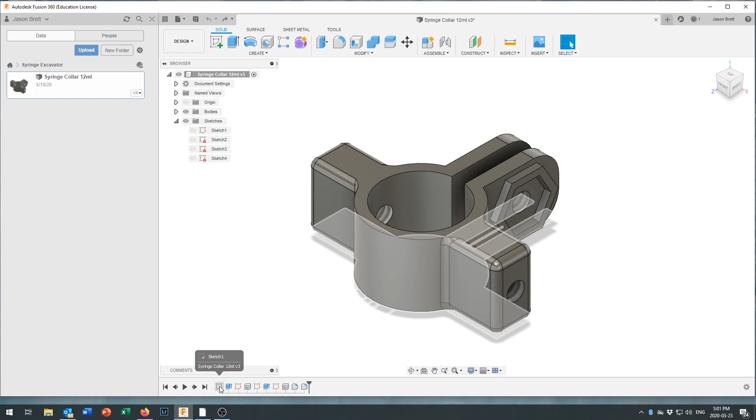Now, thankfully, when we designed the syringe clamp in the previous tutorial, we designed it parametrically, so we can come down here and go back to sketch 1 in our design. I came along the timeline at the bottom right here—these are all the different steps that I did while creating it. I went back to my very first step where I defined the critical diameters.

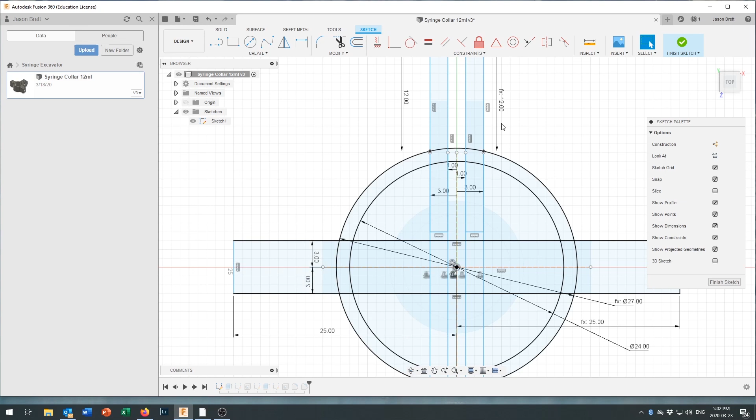And if I take that up to 24 millimeters, that makes that quite large. Since that's up to 24 millimeters in diameter right now, we probably also want to extend the mounting points out to, let's take it out to at least 25 on each side. That'll give us a 50 millimeter wide bracket. And we can finish that sketch right there. And there we are with our new dimensions all put together and ready to go.

So this will actually fit really nicely onto a 30 milliliter syringe. And we've got a few other sizes that I'll share with you in the comments or in the details section.

But now what we want to do is we want to 3D print that. And in order to 3D print it, we need to get an STL file. So what we're going to do is we're going to come over here and under Tools. Click on your Tools, and under Tools, you want to click on Make, and then it asks you for the selection. You want to make this part.

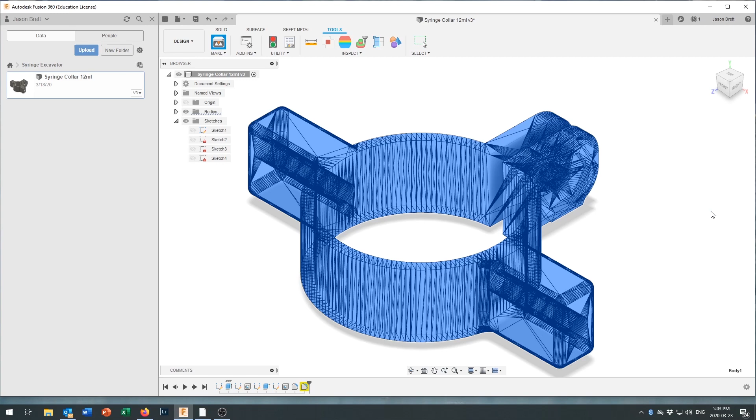It goes through, it meshes that part for you. You can leave it at a high resolution, and we're just going to click on OK. And it will ask you, where do you want to put that model? I'll put it in my 3D printed models folder, and I'll give it a unique name, JB Syringe Clamp 30 milliliters.

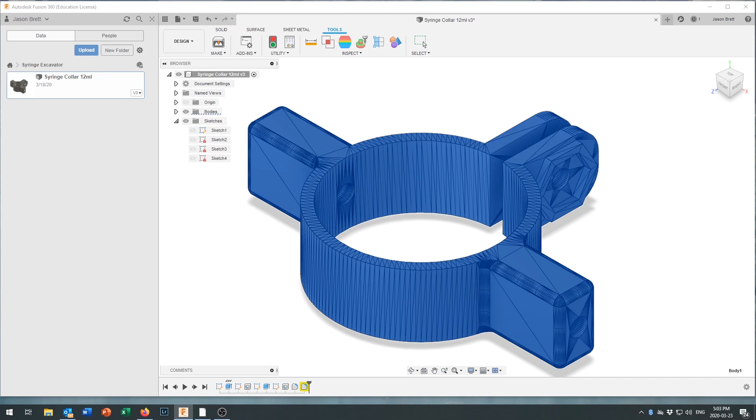Okay, so now I've exported this file as an STL file, and I can use a slicer program like Cura to slice it and get it ready for printing on a 3D printer.

So now that you've got your STL downloaded, it's time to switch to your slicing software. The slicing software I'm going to demonstrate is Cura. Cura is developed by Ultimaker for use with their Ultimaker machines, but it's also available to create G-code, sliced code for creating files on just about any machine.

There's many other slicers out there, and arguing which slicer is the best is kind of like arguing whether Windows or Macintosh is best. There's obviously one right answer, but people don't like you to tell them. What? Edit, we should edit that.

Anyway, in the software, come to software, and what you want to do is you just want to go ahead and download version 4.5 or whatever the latest version is, and it should be available for Mac or PC, and you should be able to go ahead and download that for free. It's even available for Linux.

So while that file is downloading, just hang on here a second. There's their thank you file, and you can just run it from the download folder.

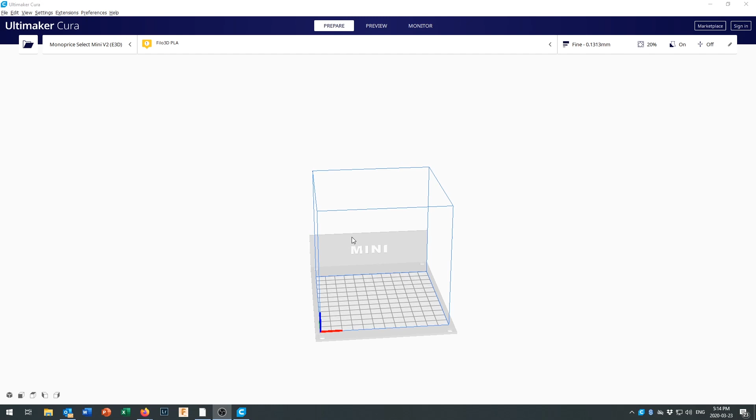Now yours probably comes up showing a picture of an Ultimaker. That's because I've had this set up before, and I've already got it configured for the Monoprice Minis that we'll be using. So you need to come into Settings, and under Printer, set your files up from Monoprice Select Mini V2, which is what we're going to be using at BCIT.

Yes, we have the Ultimaker 3. Yes, we have the Ultimaker S5. But for this part, we can make it on the Mini.

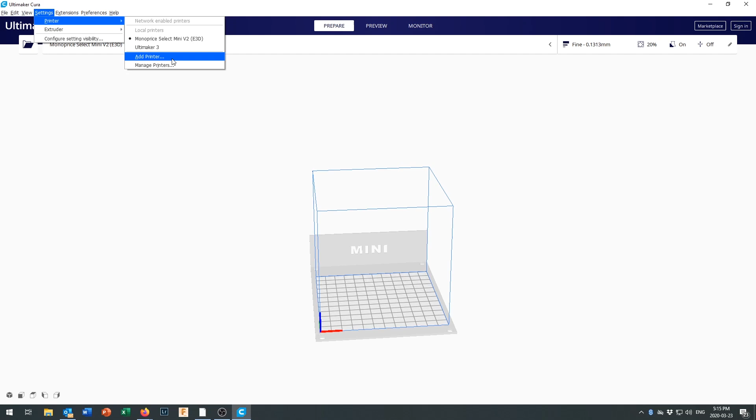So we're going to add a printer, a non-networked printer, and it won't be an Ultimaker printer. You'll just scroll down here, and somewhere down you'll find Monoprice. We've got the Monoprice Select Mini V2 with the E3D, and just go ahead and add that to your list of printers. When you do that, it pops up with a number of configurations that are already known to work well when printing from the Monoprice Mini.

So it knows some things about the machine. It knows the size of the bed, 120 millimeters by 120 millimeters, and the height the gantry can lift up to while printing. It knows that we've got a rectangular build plate. Some have a circular build plate if that's how the machine is set up. The origin is not at the center. We do have a heated bed.

The G-code flavor—there are a couple of different firmwares you can put onto your system, and they interpret G-code slightly differently. This one's known as Marlin, and that is correct for ours.

The Printhead Settings are just a number of figures describing the machine, and we've only got one extruder. You can find out more about that extruder by clicking on it right here. The nozzle size is 0.4 millimeters in diameter, so when we print, the finest detail we can possibly hope to get is going to be 0.4 millimeters.

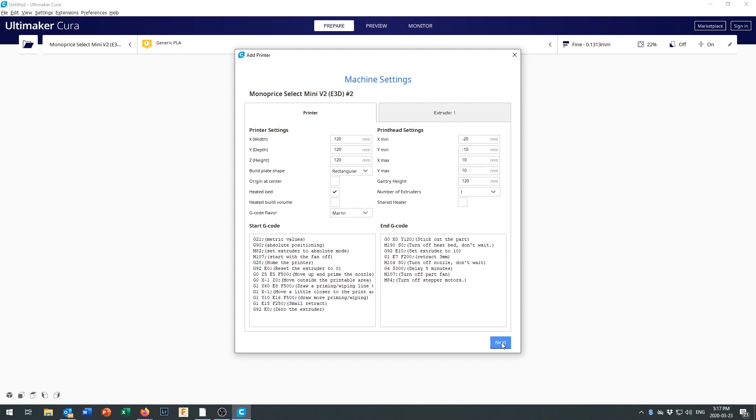And there is our Monoprice Mini. I can zoom in and out by scrolling with the mouse button right there.

What we're going to do is open up that file we just saved. So File, we're going to open a file, and I'm going to pull that in from my 3D printer models, and there we go. I saved it as JB syringe clamp 30 milliliter.

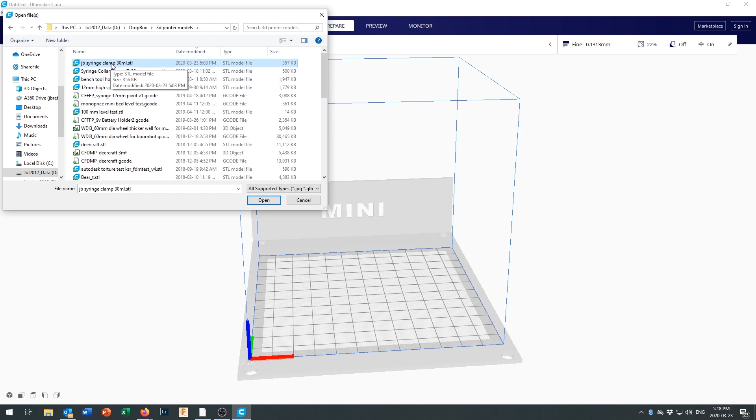That looks amazingly like the part we just created. Now, in its current orientation, this would be an absolutely silly way to make this part. First of all, we have very little space for bed adhesion. Remember that 3D printing is a continuous process of building up one layer on top of the other, so you want your first layer to stick to the bed nicely and hold down well. There's not very much surface area to allow that hold right there.

The other thing that happens is, right out here, there's nothing underneath this part, this part, or this part to support it. So when we go ahead and print and come up around here, we might be able to get out past this curve a little bit, but as soon as we start to get out to here, we're going to have material flopping all over the place and falling to the ground, and it's just going to be miserable.

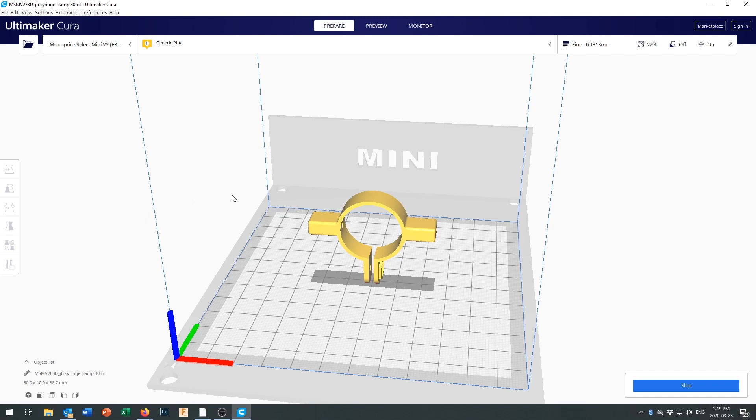So one of the first things you need to figure out when 3D printing is the best orientation for your project. Click on the project, you'll see it gets highlighted over here, and then you can rotate your model, rotating it to 90 degrees so it'll sit flush on the ground.

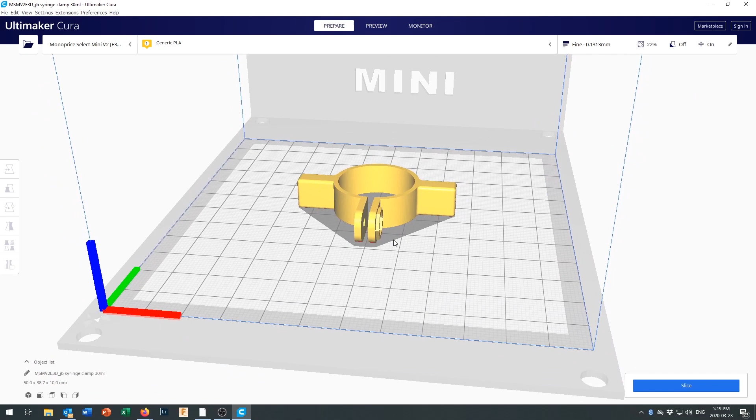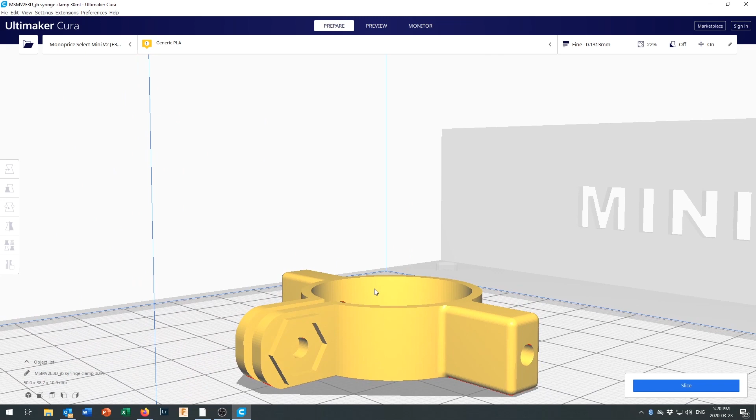Okay, so now that model is sitting flush on the ground and looks reasonably comfortable there. So now we've got more surface area for bed adhesion, and much less support material is going to be needed. In fact, there are only a few places that look somewhat unsupported, and you can see them showing up in red.

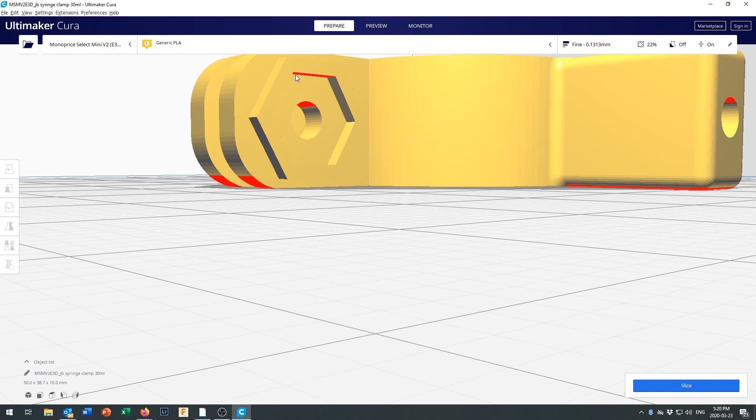If you see those red lines, that's Cura telling you it's going to have some problem making these without a little bit of support. Right up here isn't a big deal. I'm not too worried about that because while it looks like it needs support, what actually exists is that there's going to be some bridging going on, since we're coming up layer by layer, we'll have material right here and material right here. So we can have a bridge come right across there, and that's not going to be entirely unsupported.

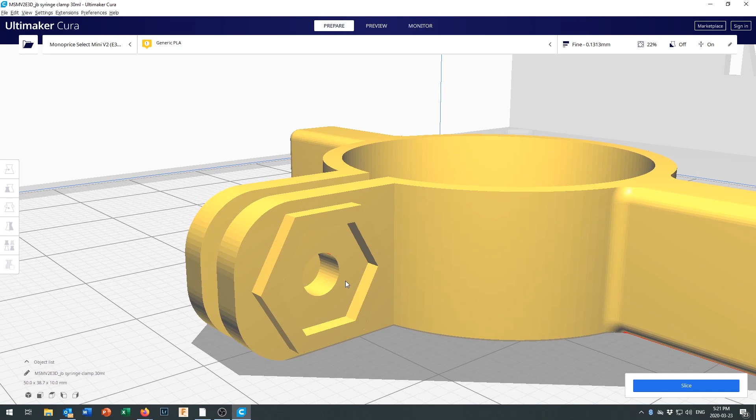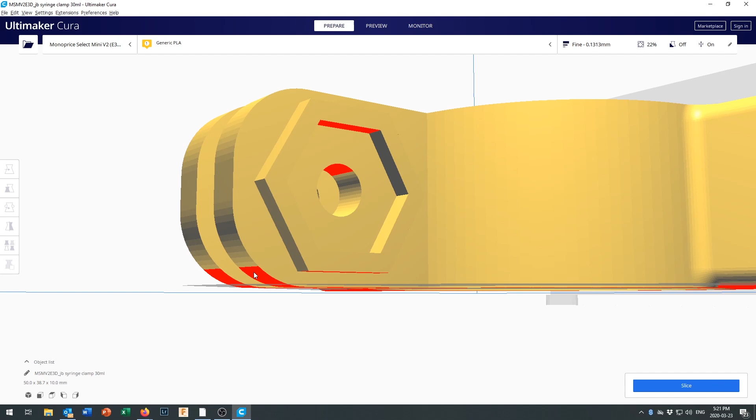Down inside the circle, we can actually clean that out after the print, so if we have any problems with anything dropping down inside there, we shouldn't have to worry about that too much. And down right in here, this part curves up, so as we go up layer by layer, we may get a little bit of loss of resolution right in here. But that's a small enough loss of resolution that I'm not going to worry about it too much. So this is a nice simple part in a really good orientation.

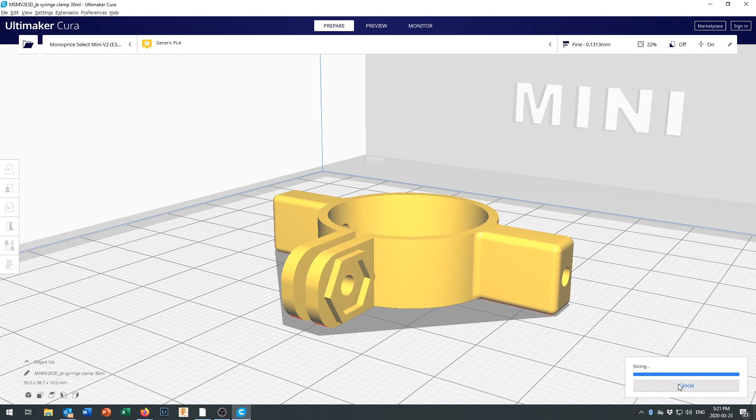What we're going to do is take a look and go ahead and slice it right now, just with the default settings. We'll come back and do some more advanced settings in just a moment. Let's take a preview of it. It says that's going to take about 40 minutes to print. After it's sliced, you should get a view that looks something like this.

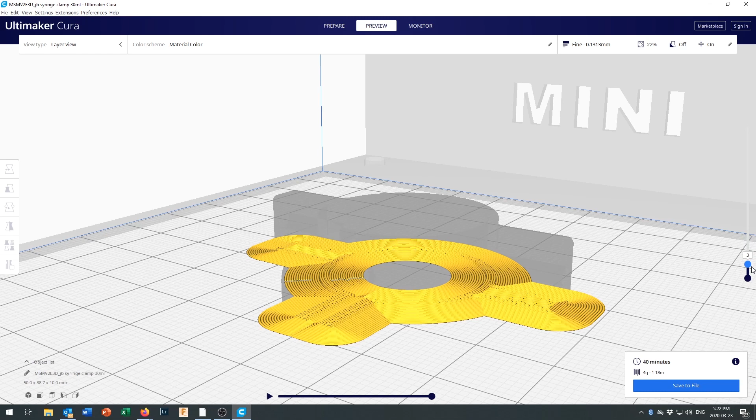Over on this side, you've got a bar you can drag down and look at it one layer at a time. Now you'll notice the very first layer is a little bit special. It's not actually anything that we made with that part, and this is controlled by the bed adhesion settings. So we're going to take a look at that and play around with our bed adhesion settings to get something that should work really good for our part.

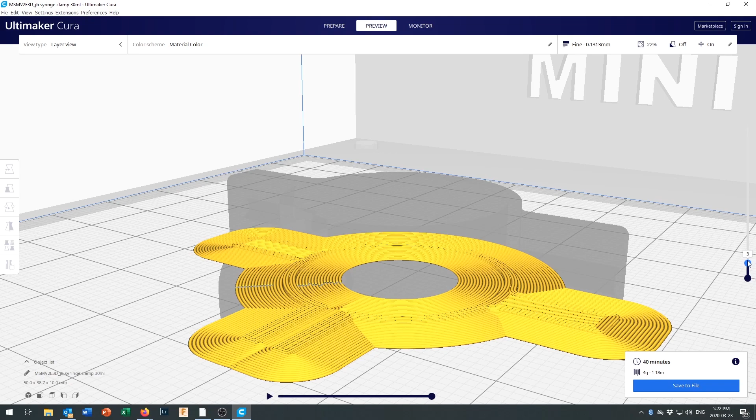And then after that, you'll see that there's a few layers of very solid material. You can see right in here that there's no gaps in that material at all. It's quite solid in here.

Let's actually change this. If you come up to your color scheme, we can change this a little bit. Let's take a look at the different line types that we have on here, so this will tell you a little bit more about what's going on. The blue material is all helpers, so that was our bed adhesion, that was helping us. And then we've got the shell in red, and that's just the outside line right there. That's going to be what's exposed to the outside world.

So if we go back down to layer 1, you can see that we've been growing that outwards a little bit. And then as we come up a little bit higher, we start to see that we've got this material right in here, and this is our infill material. The infill material comes in with a pattern, and it just provides some rigidity and structure on the inside of the part. So as we start to climb further and further upwards, we come to the top of that mount bracket right there.

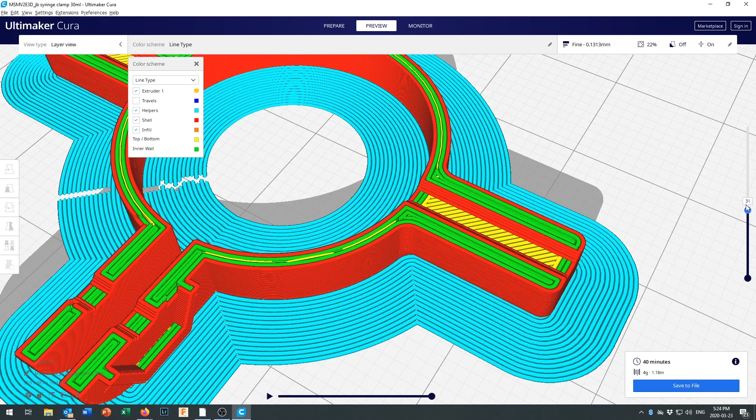Oh, that's just at the middle. I was thinking it was a bit low. And you can see the hole starting to form right in there. And then as we come up around there, the hole comes right to there, and then all of a sudden it bridges right across there. And that was one of the reasons I wasn't particularly worried about putting any support material in on that hole.

And then we come up to the top, and just before we get to the very top, it starts filling in the gaps. So we get a couple of layers of nice solid material to brace the outside. Now, that's really simple to do. That print is ready to go, and it would probably print just fine and come out working a-okay. But let's take a look at some of the other things that we can change on there if we needed to optimize things a bit more.

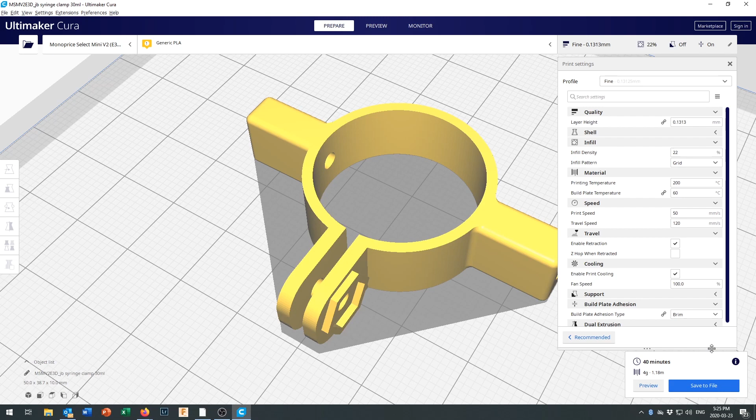So right now, we are in the simple view. So come back to your prepare. And what we want to do is we want to come in here and start changing some of these settings. So click on the arrow right there, and now you've got access to all of the settings in Cura. And this is where a lot of very powerful tools reside. Now, just as powerful tools can help you do excellent things, powerful tools can also mess you up. So let's take a quick look at what some of the settings are.

Now, your layer height right in here controls the thickness of each one of those layers. And you can see that we're set at 0.1313, which for the Monoprice Mini is a fairly fine but nice layer height. You can change that up if you want. You'll get a little bit less resolution in your print, but whereas it took 40 minutes before, if we go up to 0.18 and we click on the slice button, you'll see we're now down to 29 minutes. And that's because each time the 3D printer head moves over top of a spot, it's going to be extruding 0.18 millimeters of material instead of 0.13.

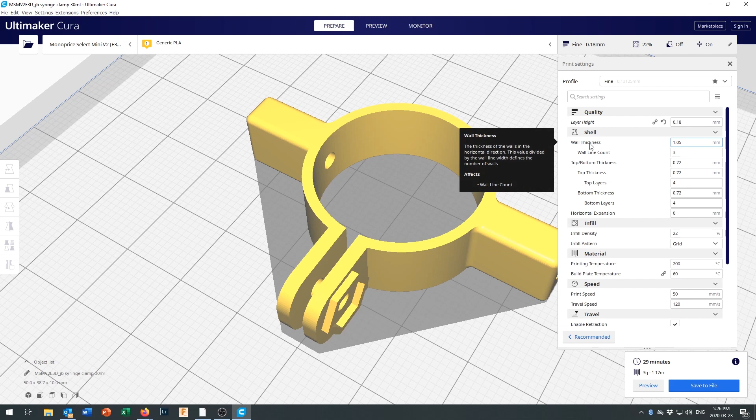The shell can also change our settings on here. And so the shell, when we were looking at our preview, you could see that we were talking about the wall thickness. And so let's come back to a preview view right here. And here you can see the wall thickness. If I zoom in right over here, let's come down a little bit. So we've got some infill material right there. You can see our wall thickness consists of 3 layers of solid continuous material. And you can see that our wall line count is equal to 3.

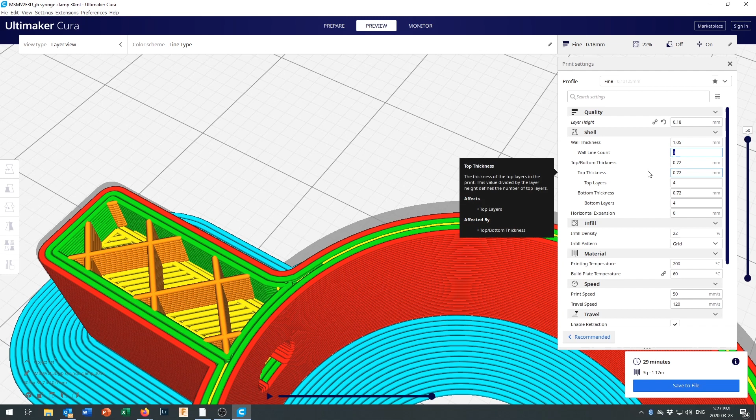We can bump that up if we want. If you need a thicker wall to make it a little bit sturdier, go ahead and slice that. And you'll see that now we've got the outer and then 1, 2, 3 behind that. And so we've got an extra layer of material on there. Usually that'll take a little bit longer to print and take a bit more material, but this is a small enough part that it didn't really show up. And where we've got 2 outside walls and not enough space to get 4 walls on the inside, well, we have an outside, and 2 insides there. If that was narrower, we'd just have 2 outsides.

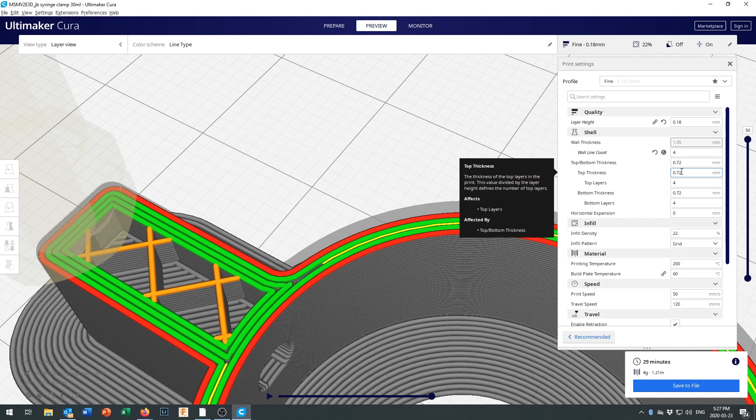The top and bottom line thickness allow you to control how many layers you get at the top and the bottom. So as our preview comes up close to the top, you can see here we're at layer 55 is the top, 54, 53, 52. So those layers multiplied by the height tell you how thick the top and the bottom are. So again, if you need more strength in the shell of your part, you can increase those dimensions. Most of the stuff we're doing doesn't need that. You can also express the top thickness in terms of layers. Okay. So when you're done looking at a set of options, you can click the little tab right there and it just pops back up there.

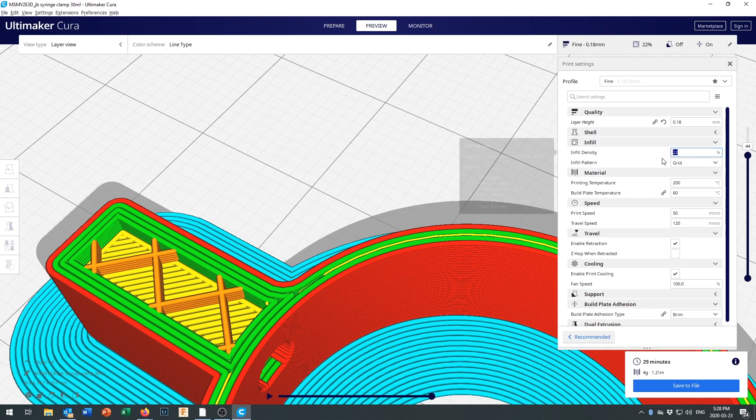Infill does make a difference, and there's some interesting infill options. So right now we're set at 22% infill, which means that the space inside here is going to be 78% empty. Well, if we wanted to fill it in a bit more because we felt it needed to be a little bit stronger, and usually 22% is plenty, but if we wanted it to be filled in a little bit more densely, we could go up to 44% infill. We could slice it again.

And now you can see that we have a lot more density right in there. The lines are packed much closer together. There we go. Just had to get the rendering right back the way it was.

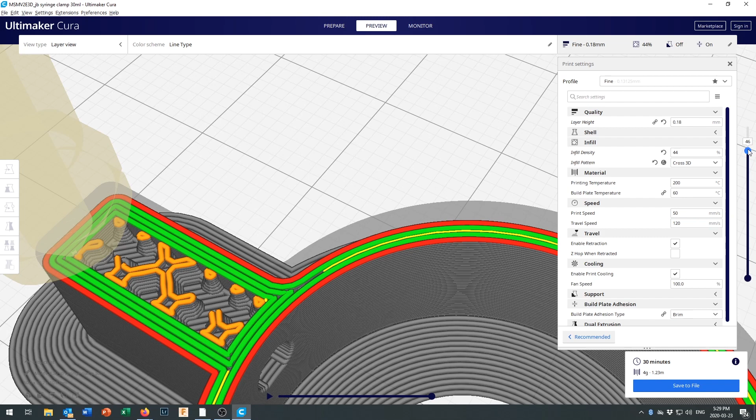So we've also got different patterns that you can go with. Some of them create themselves in a 3D pattern, and you only see them after you've sliced them to see what's going to happen with that 3D pattern. There we go, off the top. The X's come together, the X's come apart.

I don't think there's a big deal to be gained for most of the printing that we do. Just leave it set to grid, but it's nice to know that it's there, and that in the event that you do need to do something special on the inside of your project, that'll work well for you.

For the material, we're working with PLA, polylactic acid, a biodegradable plastic made from corn, I believe. And so I've played around with it on the Monoprice Mini. It sets a default temperature of 200. I like to set mine up to 210. I find it just makes the plastic softer. It flows a little bit more easily out of the nozzle.

And it's really challenging for the Monoprice Minis to get their build plate all the way up to 60 degrees. They will do it, but you'll be waiting longer for your print to start. So sometimes I'll set it down to 45 or 50 degrees. And really, you just don't need it that hot.

Your print speed and your travel speed. Print is the speed that the printhead moves at, 50 millimeters per second. And travel speed is the speed that the printhead moves at when it's not printing. So one, print speed, is when you're printing, and travel speed when you're not printing. So those are two numbers that I tend to leave alone.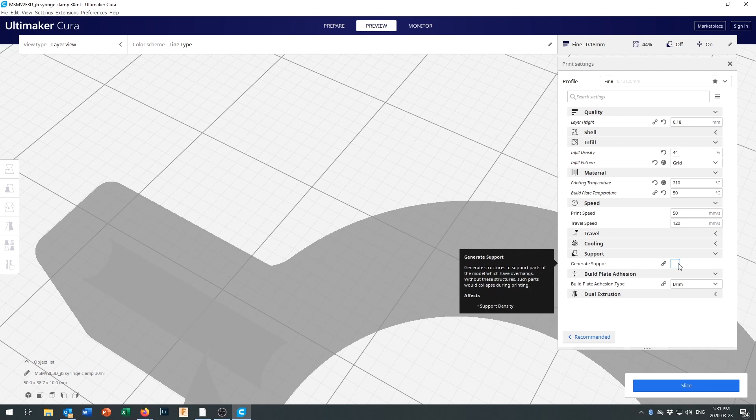Like I say, our drawing doesn't need a lot of support material, but let's turn it on and let's see what happens if we ask for support everywhere that our overhang is greater than 50 degrees. And you can see that cost us a couple of minutes of printing. And let's take a look right in here. And down at the front right here, you can see that it's generated this blue material right here, representing that as helper material. And it's come all the way through that hole.

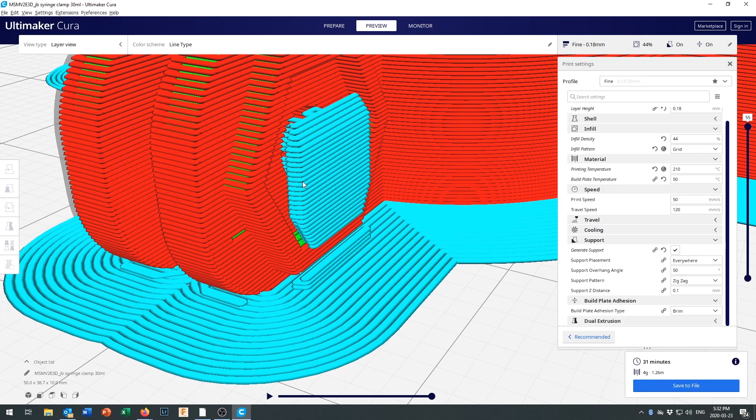Now, the whole idea behind support material is that support material is made with just enough of a gap that after your print is all done, you can break it away, but until your print is all done, it intersects just right down here and prevents anything from drooping down too low.

So support material is a really useful tool, but does run into problems sometimes because it ends up clogging holes and becomes just one more thing that you need to take off in your finishing process. If you can get by without adding support material, then your life is going to be happier. Quite often, I'll design parts intentionally for 3D printing and try to make sure that they don't use support material.

If you do have to use support material on the Monoprice Mini, one of the things that I suggest is that you change your setting here from 0.1 millimeter up to 0.2 millimeter. And I find that really helps the support material break away more easily afterwards. It just gives you that extra little gap and that extra little bit of space that makes your life go easier. But again, to make your life easiest, design your part so you don't need support material.

Now, what you see down here, these blue lines right here, are what are called a brim, and they're designed to help hold your part down onto the bed. If we do everything right and the print beds are nice and clean, on the Monoprice Mini, I haven't been needing to put any kind of build plate adhesion material down lately, and I've just been printing the object.

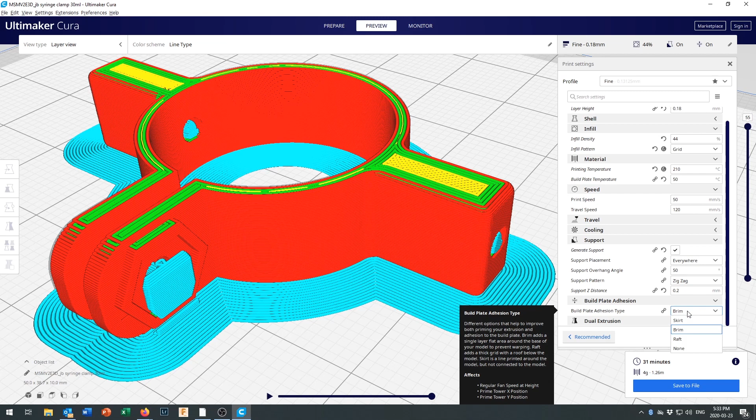But since we're here, let's take a look at a few of the different choices. You can use a skirt, which just runs a few lines around the outside to make sure the nozzle is clean and ready to go. It's really not doing much to help you with adhesion in any way, shape, or form, but does make sure that the nozzle's all ready to go and that you're dialed in and ready to print your part after the skirt has been printed. We saw what Brim was.

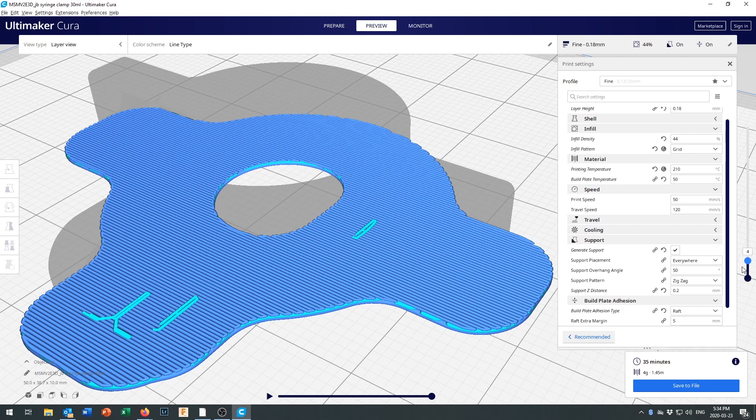The other one that's quite common is Raft. And let's slice the Raft in right there. Now, the Raft is a little bit different because where the Brim was just one layer and it was part of the bottom layer, the Raft is actually printed underneath the project, and it starts with widely spaced lines pressed hard into the bed and designed for maximum adhesion to the bed. And then it builds its own flat build surface right on here for your project to start printing on.

And you'll see that it leaves a little bit of a gap right in there, just enough of a gap that it stays connected, but not so much of a gap that when your print is all done, you can't break it away in here, because you want to be able to snap this off and get this out of here, get rid of all the blue stuff.

There's a whole bunch of different options that you can pull out on any of these settings. If you come in here and click on the gear logo, you'll see that there's so many different settings. So if you want to add any of those settings to your window so that you can work on them, you can just click on that setting right in there.

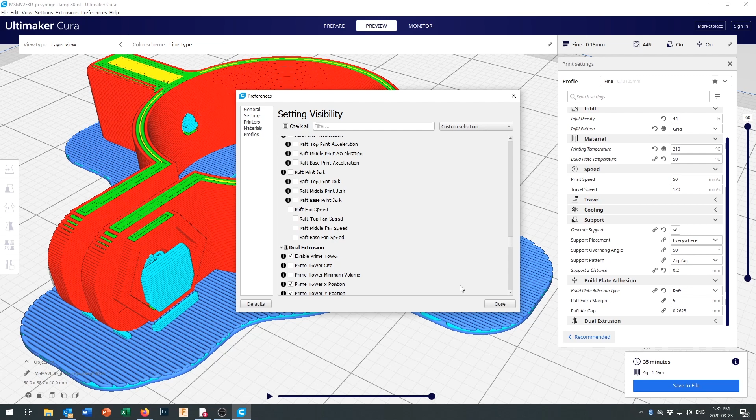The one I want to work on is the Raft extra margin. You can see that the Raft comes quite a ways out to the edge, and I find that tends to be a little bit of a waste of material to come 5 millimeters all the way out. You could set it to 3 millimeters and slice that. And I find that'll print just a little bit faster, use a little bit less material, and still have equally good adhesion.

So once you've gone through and sliced your file, it's really important that you take time to take a preview of it. Okay, then you're good to go. What you can do is you can save to file, or if you've got a removable drive plugged into the system, you'll probably see it flash up and offer you the option to save directly to the external drive.

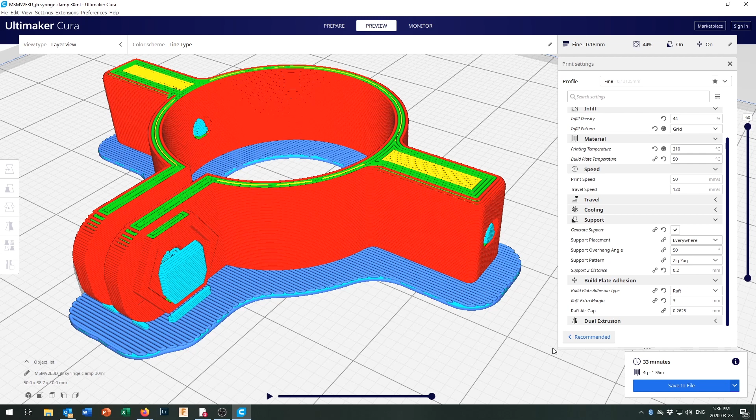Okay, there you go. It'll say save to removable drive, and then you can just take that and walk it to your 3D printer and plug it in. Personally, I'll save to file because I'm not going to a printer right now. Click on save to file and go ahead and put that into your 3D printer models folder, and notice the name on here, it modifies it.

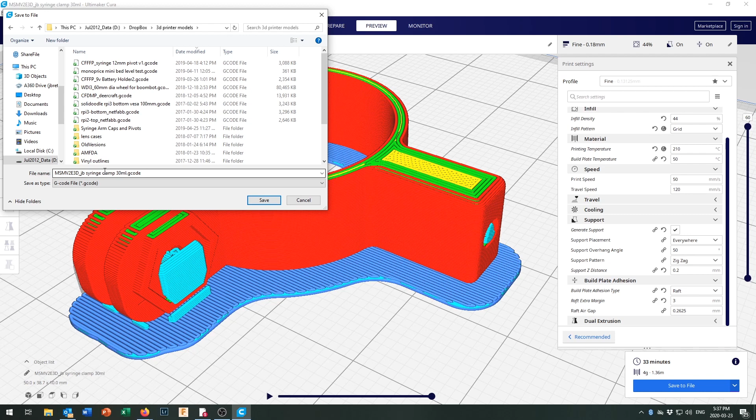Okay, Maker Select Mini V2 with the E3D head. There's my file, and it's now got the G-code extension on it, and it saves that file as G-code. All right, so that's printing one of them. Well, what would you do if you wanted to print two of them? Okay, because that would be a far more efficient use of your print time.

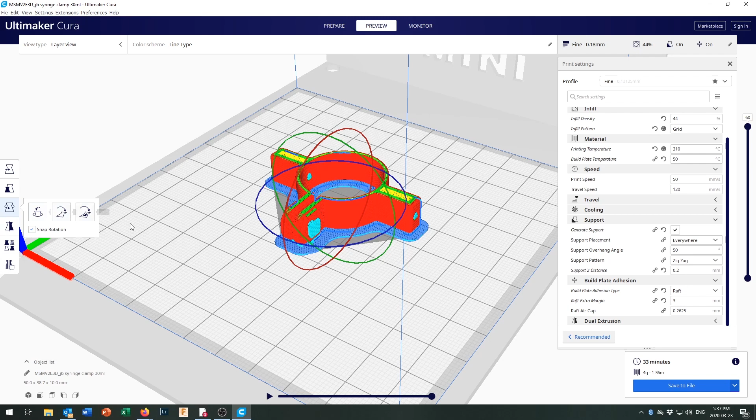And come back here, take a look at your options over here. You can move. Try not to scale if you've got your size right the first time out, but you can definitely come in here and pick that up and move it around. Right click on it. You've got all of these options right in here. Multiply selected model. Give me 3 more copies.

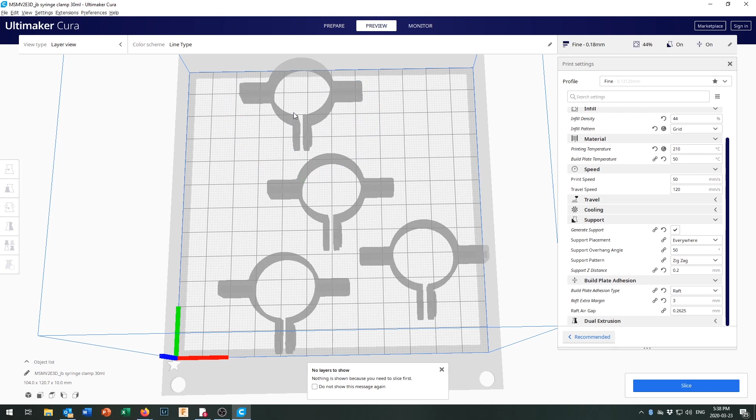And if you want to print that many copies, you'll want to make sure that they're all aligned so that they fit on the board. So pick up, move, and move them around so that they've got space to all fit together on the bed.

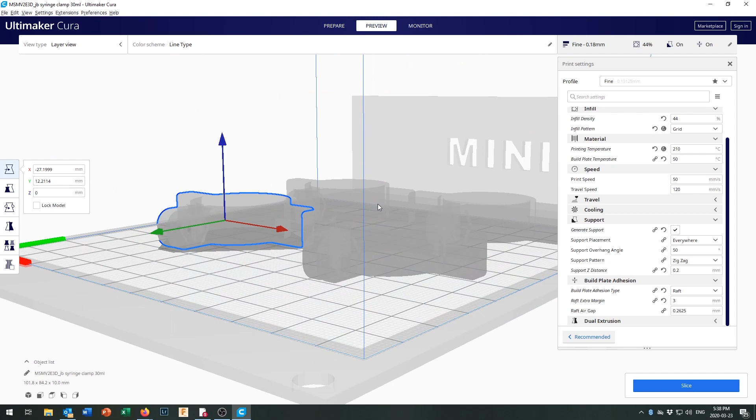Now, I won't say that's all that there is to setting up a 3D print. But for an FDM printer and a small part with no particularly complex supports, that's a pretty good way to go about setting it up. All right, there's a little introduction on how to set something up in Cura.